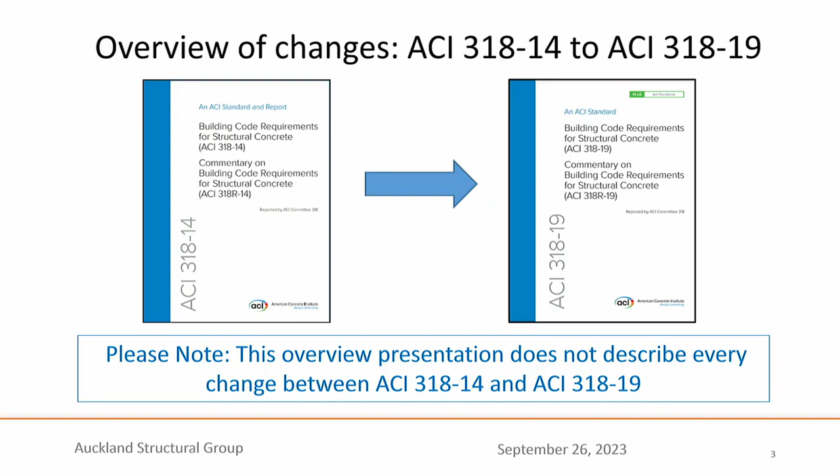Of course, there's a lot more background that I could fill in about the basis of the code as a whole, but hopefully this will get you interested and maybe provide you with some information on where we're headed in the U.S. with our concrete codes. Just a warning, if you are familiar with the 2014 edition, this presentation is not a complete introduction to all of the changes in the 2019 edition. I have to sort of put that disclaimer there.

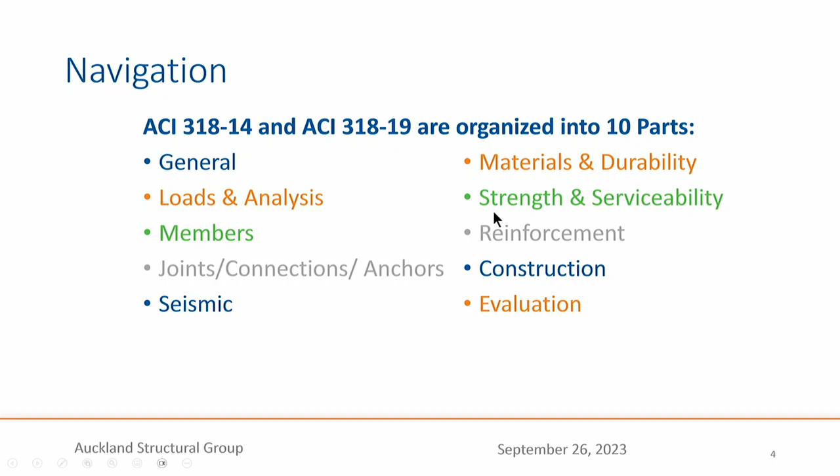So with regard to the code in general, it is organized currently since 2014 into 10 parts as shown here. I won't go through all of them, but you'll be particularly interested perhaps in the seismic part down here in the lower left. And I will be talking about some key changes and trends in most of these sections as we go through.

All right, first, existing structures. Very often we have to evaluate existing structures for their strength, their capacity, and sometimes for seismic capabilities or seismic resistance.

This code is for new design, but there is a provision that says if you want to use this code to design elements as part of a retrofit, it's perfectly valid and is permitted. The commentary to that statement points the reader to another document. It's actually another building code called ACI 562-19, which is the official code for evaluation and repair of existing buildings. I just want to caution that is not seismic evaluation and upgrading of existing buildings. It's all things non-seismic, although it does point to some other places for seismic.

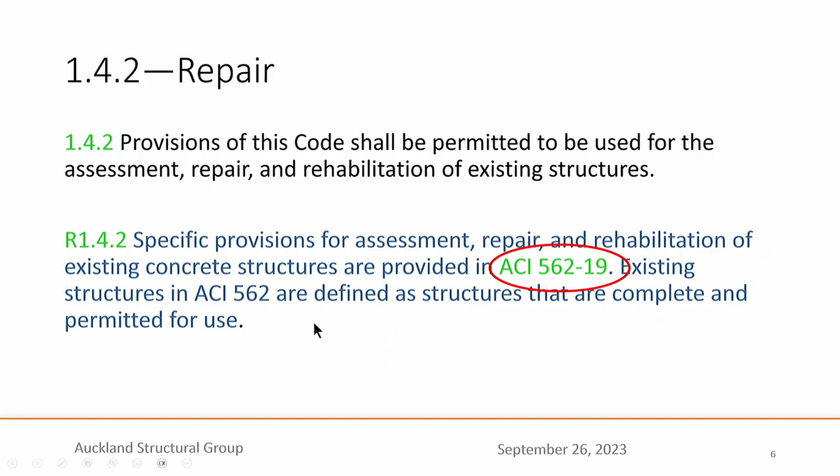So this is how we deal with existing buildings. But I want to also point out there's a chapter 27. It's, I believe, the very last chapter of the code. This chapter is titled Strength Evaluation of Existing Structures, and you might think, aha, that's what I need to know if I have an existing structure and there's a change of occupancy and I need to design, say, or check for higher loads in the building.

It's really what it applies to is new construction where there's some doubt about the strength. Perhaps concrete test strengths came in low, or there was an error in construction, or for some other reason the building is new but needs to be evaluated. So we as engineers understand very well how to approach an existing structure that may have deficiencies and analytically evaluate its strength, taking into account those deficiencies.

There's another approach, which is load testing. This isn't used very often in the U.S., but when it is used, it's a very helpful and definitive proof of the capacity of a building. There are two procedures available for testing the strength of a new building. Let's just imagine that we're testing a two-way concrete floor slab.

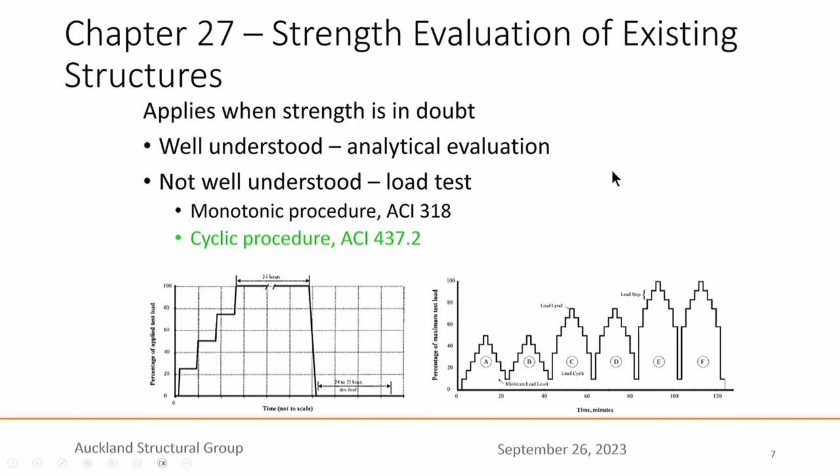There is another method, a cyclic procedure, which is in a different ACI document, ACI 437.2. The scale here is on the order of 2 hours. It's a cyclic load, unload, load, unload, higher amplitude load, unload, and so on. This, of course, then is a much faster and more efficient way to test the capacity of a new structure. So just letting you know about those two approaches.

Let's get into specific types of concrete members.

For one-way bending, one-way slabs, the ACI code has structural integrity reinforcement requirements. These are minimal reinforcement required to be continuous through an element, whether it's a beam or slab, and developed at each end. It's just a minimal notional amount of reinforcement to help forestall progressive or disproportionate collapse. It does not take the place of a progressive collapse analysis, just a minimum amount of reinforcement to help stop a sequential collapse.

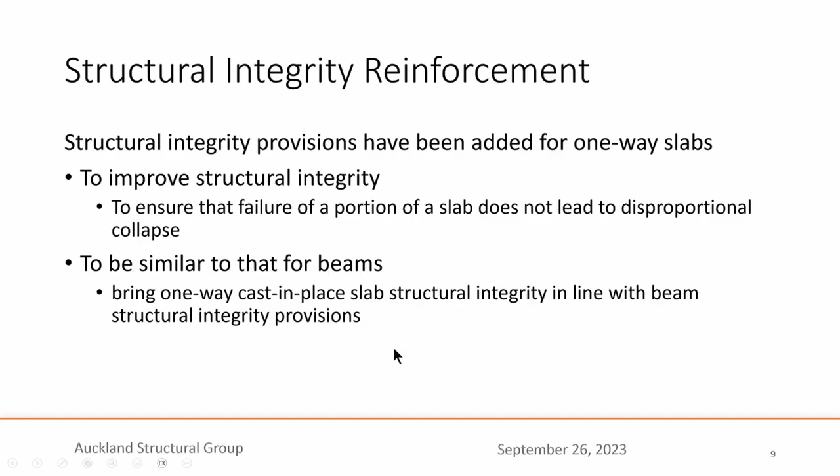There are new provisions now for this integrity reinforcement for one-way slabs, very similar to the requirements for beams. I won't go into the details, but it's a very simple check and a zero or low-cost detail, because the bars you need are probably already in the design.

Moving on to two-way slabs. We've had, since time began, two methods in the code meant to be approximate methods, introduced pre-computer-based analysis days. One is called the direct design method, and the other is the equivalent frame method. These are for two-way slab systems, two-dimensional approximate prescriptive methods. We found that those are very rarely used any longer, but they're still valid, nothing wrong with them. They're just approximate and conservative. So we removed them from the code, but put a statement in the code that those methods are still valid to be used.

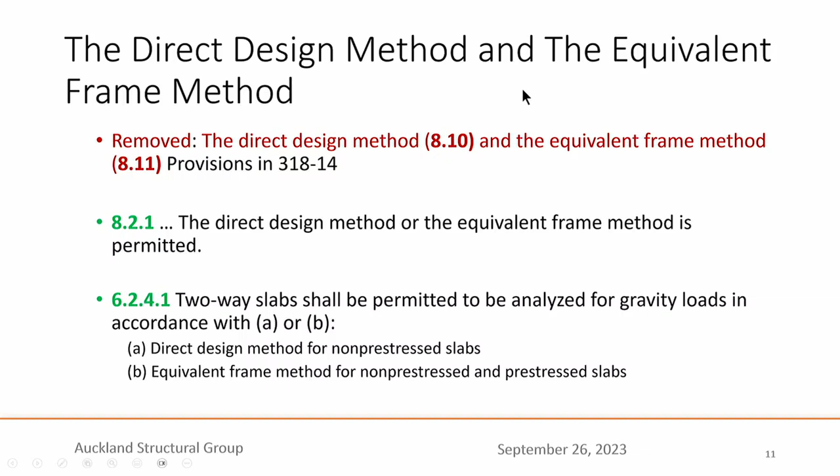Either the direct design method or the equivalent frame method, you just have to look back to an earlier version of the code, but you can still use them. We're just saving some trees by not printing as many provisions.

Here's an interesting one that has to do with openings near columns in two-way concrete slabs. Previously, up until 2019, the rule was that if there was an opening near columns or near slab edges, and that opening was within 10 times the overall thickness of the slab—H is the total slab thickness—then one needed to reduce the effective perimeter for punching shear. Those openings would have an effect on the punching shear strength.

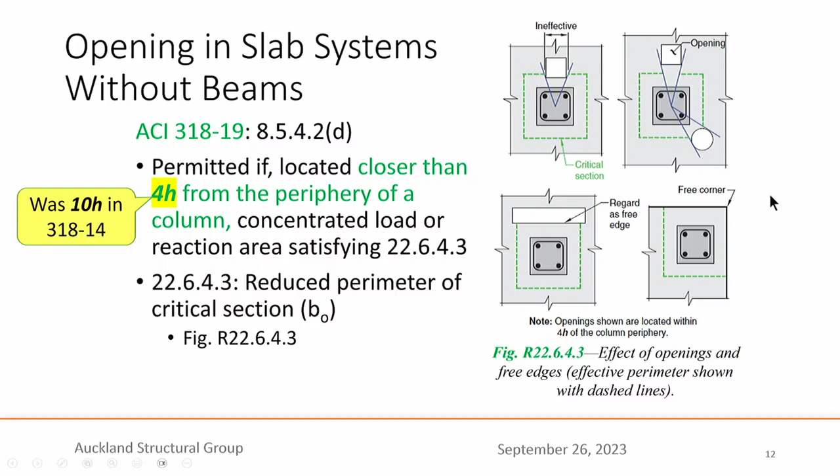That number has been reduced to... was 4H and is now 10H. Was 10H and is now 4H. So these openings can exist a fairly nominal distance from the face of the column and not affect it—or you don't necessarily have to check, you can if you like, but you aren't required to check for the effect of those openings. Kind of an interesting liberalization of the code.

Another new provision related to two-way slabs: in the United States it's actually quite a common form of construction to have 2 stories of concrete structure starting at the ground level, and then above that have 5 or 6 stories of light wood frame construction. That concrete portion is called the podium, and all of the wood shear walls in this 5-story wood building on top of the podium bear on this podium slab.

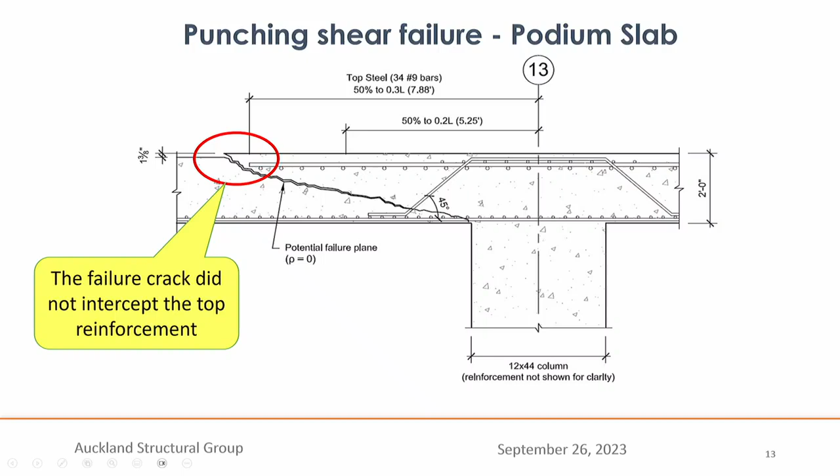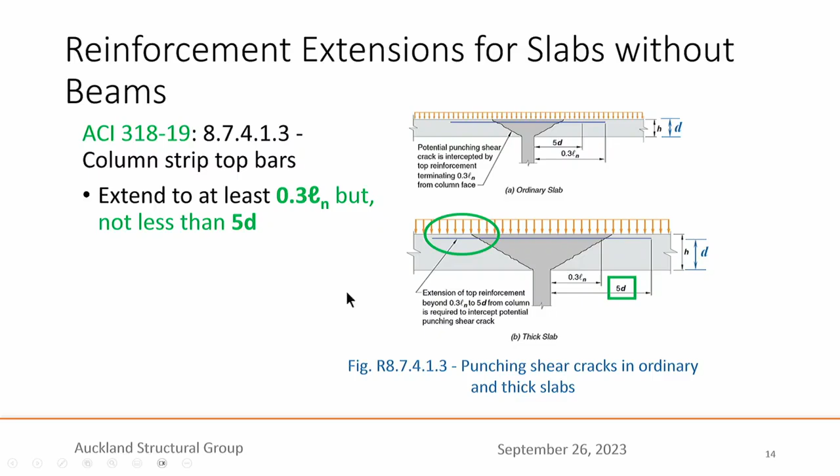On the top is the provision for a normal or thinnish slab, let's say 30 centimeters thick. Once the slabs get quite thick, there's a secondary check now to extend the bars further, so that they extend past the path of propagation of that punching shear failure surface through the top of the slab, and the bars are crossing that crack. We recognized a condition where something was not quite right, and we fixed it.

Post-tensioning construction: in some parts of the United States it's very common, for instance in the area where I live, the Pacific Northwest. In other areas, it's very uncommon. So the use of post-tensioning varies quite a lot across the United States.

One thing we updated just to simplify things: when you have a post-tensioned slab, you're also required to provide some non-post-tensioned deformed reinforcement. We simply changed the spacing requirements for the maximum spacing of that non-post-tension reinforcement so that it matches that for non-post-tension slabs—so it's the same for both types. That maximum spacing is either 3 times the total thickness of the slab or 18 inches, about 450 millimeters.

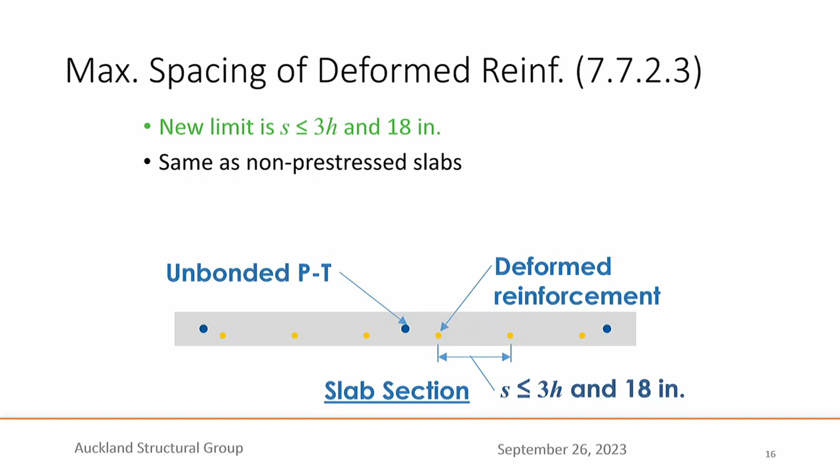Also related to PT: some forms of post-tensioned slab construction have groups of tendons very close to each other, called banded tendons. There may be as many as 8 or 10 tendons close together, with the anchorage forces concentrated in a line along the edge of the slab. To prevent bursting of the slab under these high localized pressures, we require backup bars and hairpin bars, which resist the high tensile bursting stresses that occur just behind the anchor. That's a new provision related to this configuration of reinforcement.

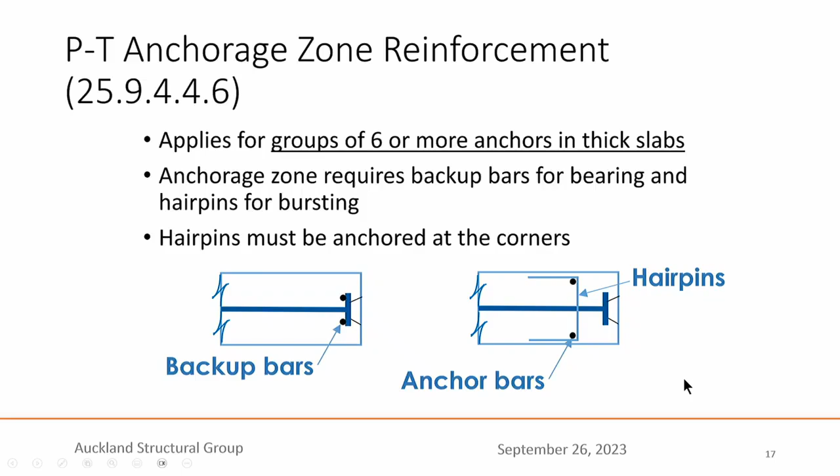Moving on to a new type of member, walls. We've had a change in philosophy related to cantilever retaining walls, in that we now treat them not as walls included in chapter 11, but as foundation elements in chapter 13. We reasoned that cantilever retaining walls are really closer to foundation elements than freestanding concrete walls, partly because the lateral loads on the stem are the dominant load controlling design.

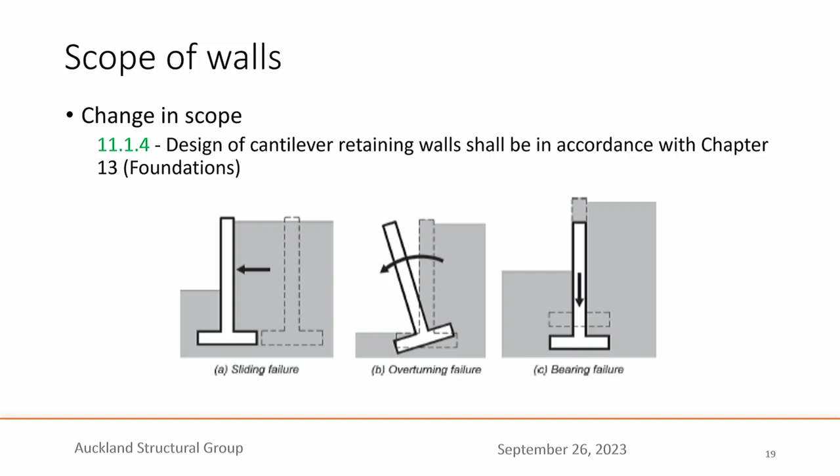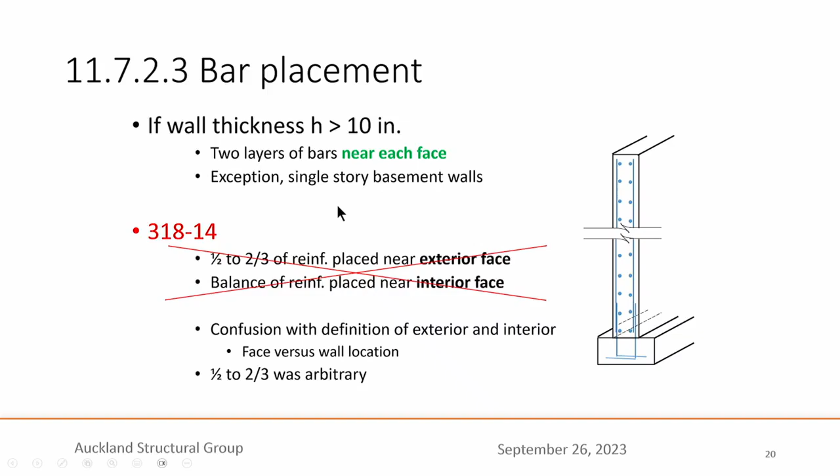Another detail that helps clarify reinforcement placement: prior to 2019 we had obscure, difficult to understand provisions about the number of layers of vertical and horizontal reinforcement in a wall. If the wall was greater than 10 inches, about 250 millimeters thick, you needed, and still need, 2 layers of reinforcement, one near each face. We had confusing rules about half going here, two-thirds over there, and we got rid of all that. Now you just need 2 layers of bars, and typically designers put half in one face and half in the other. We do have an exception for single-story basement walls, used a lot in commercial and residential construction, where this requirement is less important. So it's a simplification and clarification.

Foundations are a major use of reinforced concrete, and we constantly update those provisions in the 318 code. We added design provisions for cantilever retaining walls, now in chapter 13. We've also done a lot of work on provisions related to deep foundation design, covering driven piles, cast piles, auger cast piles, and various deep foundation elements used particularly in poor soil conditions. We've also added provisions related to minimum concrete strength for both shallow and deep foundations, and cover requirements to control corrosion.

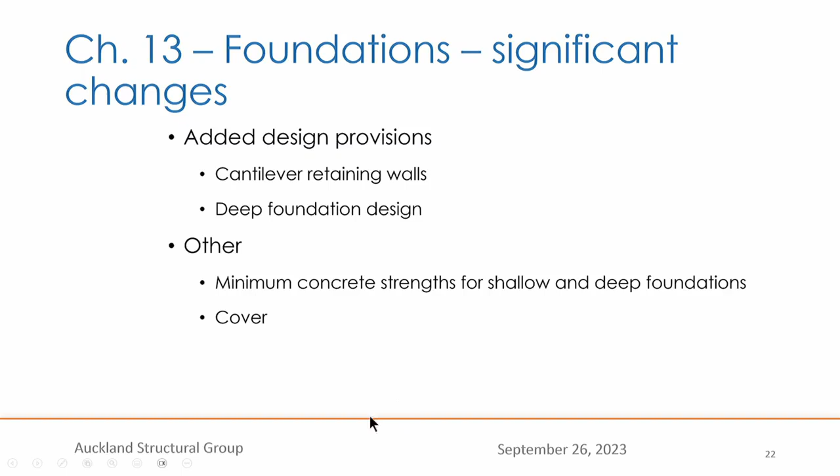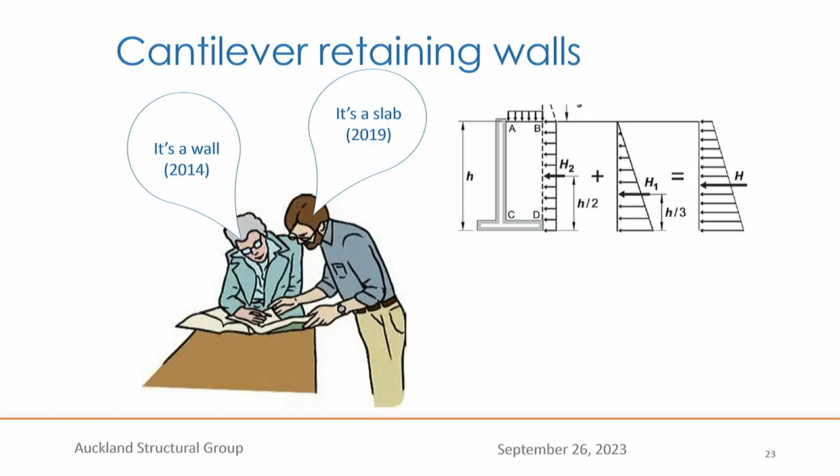I mentioned we moved cantilever retaining walls into the foundations chapter. We also changed the basic approach to their design. Previously they were treated as a wall, subject to wall design provisions. Most walls are not governed by very high face loads or lateral loads, those are what I'd call true walls. Retaining walls are heavily loaded out of plane, so we decided to treat them as slabs, cantilever slabs. These stems are now designed as a cantilever slab, a one-way cantilever slab, which makes a lot of sense.

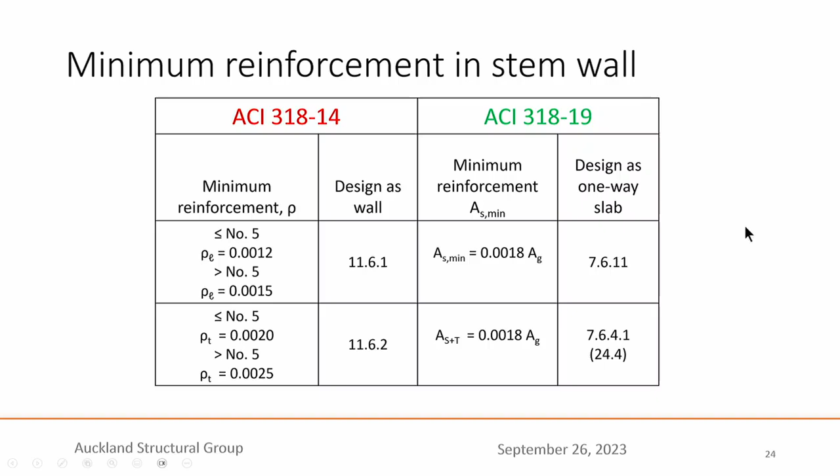Here's a big important change. In the U.S., for reasons I don't understand, we've had deep foundation provisions for concrete type deep foundations spread across 3 different design codes: ACI 318, the International Building Code, the master code for the U.S. that refers to material codes like ACI, the wood code, masonry code, and so on. But there were provisions for deep concrete foundations in the International Building Code, which shouldn't be there, they should all be in the ACI code. So we are gradually bringing all those provisions into ACI 318.

In 2019 we were successful at bringing many of those provisions out of the other codes into ACI 318, and we hope to complete that process in 318-25. We'll see.

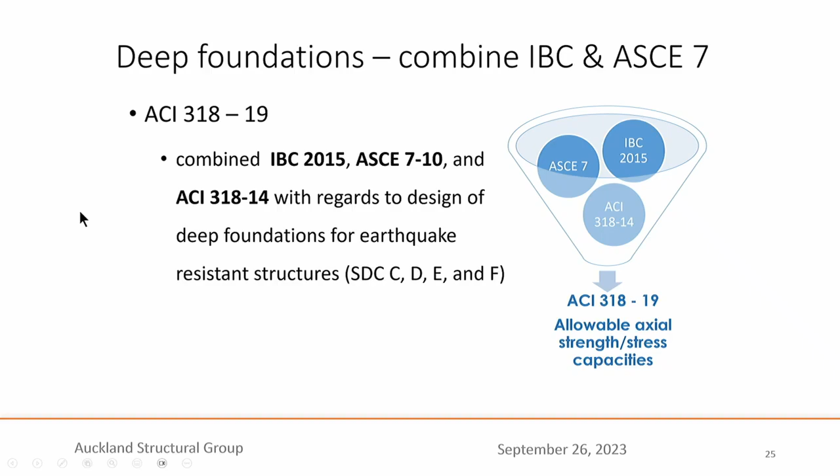Anchorage to concrete, everyone's favorite subject. We actually reorganized this chapter so that it mimicked more closely the organization of the other member type chapters. And we also added...

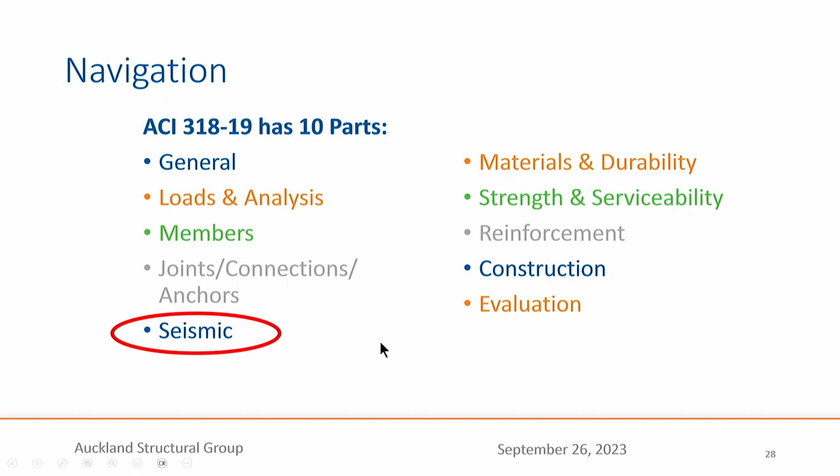So now let's talk about seismic. Really important subject, both in the U.S. and New Zealand. I want to point out there were quite a few changes to the seismic provisions between 2014 and the current 2019 edition. I wrote two articles in the magazine Concrete International with S.K. Ghosh summarizing every change in great detail, except for the deep foundation ones, because that would be like a whole other two articles. If you look online at Concrete International, I believe you can just find those for free. If you want to know what the current seismic provisions are in the 2019 ACI code, that would be a good place to get a very condensed tour through those.

So, another big change in seismic was we added what we call higher strength reinforcement grades to the code for seismic force resisting systems. This table here, which is very small, but I've just highlighted with green boxes the updates that are included to allow higher strength reinforcement. And what do I mean by higher strength reinforcement? We've introduced the possibility of using 550 and 690 megapascal strengths for certain elements of certain seismic systems.

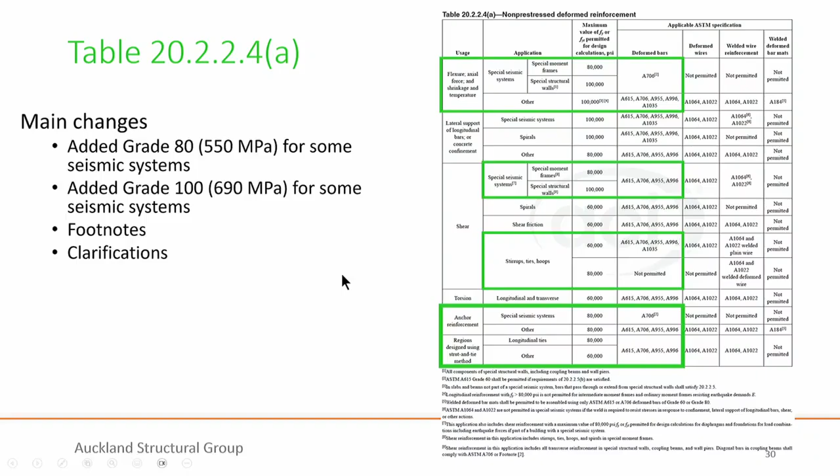All right, now let's talk about special seismic systems. We have what we call special moment frames and special shear walls. Special means they are detailed for the best possible seismic performance. There are also intermediate systems and ordinary systems of various or defined standards for different types of lateral force resisting systems which are deemed ordinary, intermediate, and special. I'll just describe the special ones here.

This is where these higher grades of reinforcement are anticipated to be used. The only changes really relate to the spacing of shear reinforcement or confining reinforcement for the higher grades, because presumably you are either using the same size or a smaller size bar. You're allowing a higher stress because they're a higher grade longitudinally. Therefore, their tendency to buckle laterally is higher than for the lower grades. So the lateral support of those bars needs to be closer together. Therefore, the hoop or tie spacing for the higher grades is reduced compared to the lower grades. So we just see that here.

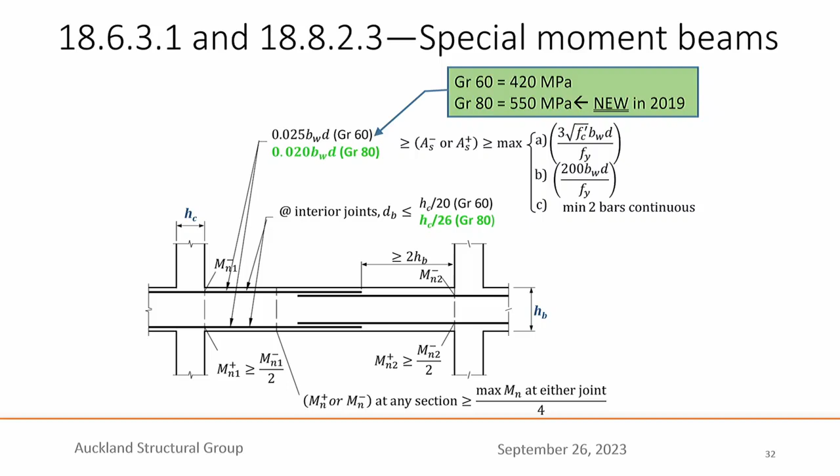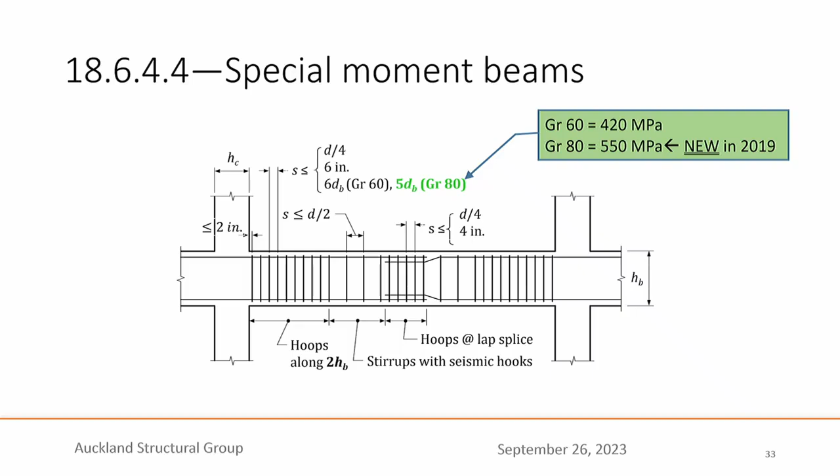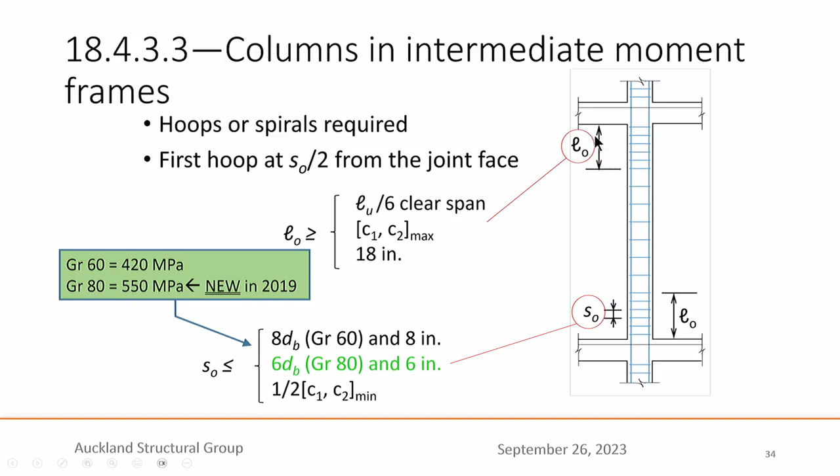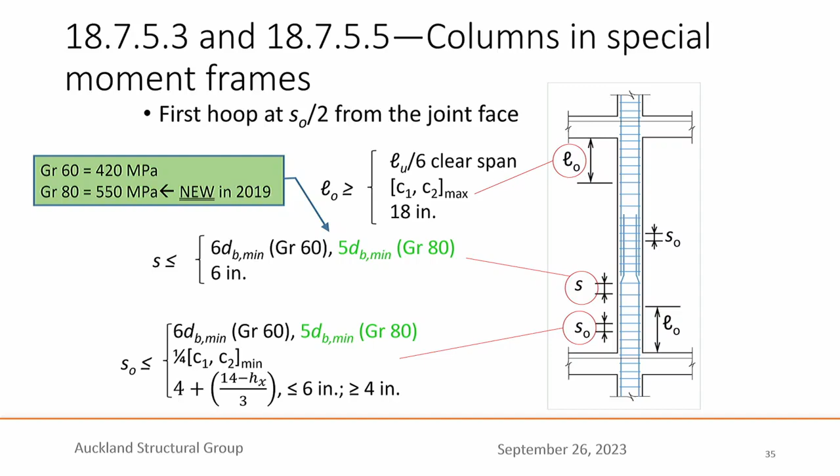Whatever's in green here is a new, slightly closer spacing for one of the higher grades for 550 megapascal in special moment frame beams. I won't go through these in detail, but also the spacing in stirrups in special moment beams has a slightly different requirement for 550 megapascal bars. Columns in intermediate moment frames have a change in spacing over these plastic hinge regions for the higher grade reinforcement. Columns in special moment frames have more reduction in spacing for the higher grades of reinforcement.

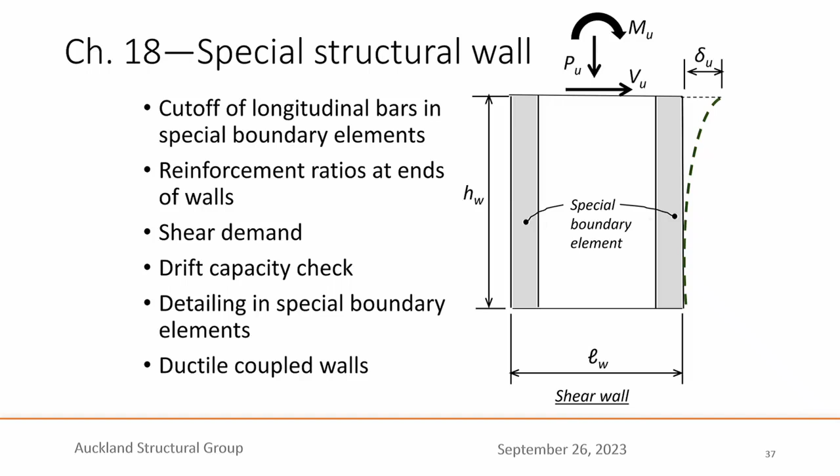And then we have a new old structural system, ductile coupled walls. I'll explain a little bit more about that when we get to it.

So these longitudinal bars running up the main flexural reinforcement at the ends of walls - we used to require that they be continued past the point at which they were no longer needed by 80% of the length of the wall. So if you had a very long wall, you could be required to extend those vertical longitudinal bars a quite long distance, 2 or even 3 stories, which doesn't really make any sense. It turns out that 0.8 provision came from a kind of crude beam analogy for walls that is not actually correct.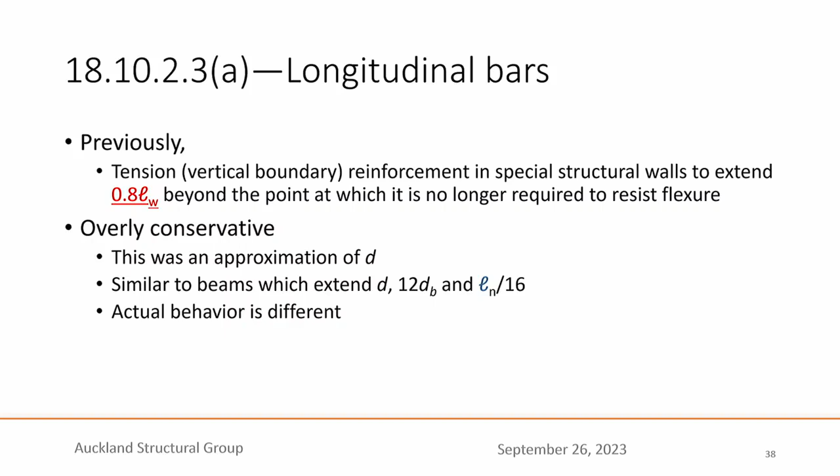So we've changed that to at least 12 feet - not quite 4 meters - but not more than 1 bar development length above the next floor. So gone are the days when these bars have to be sticking up in the air 2 or 3 stories. At most, they need to be sticking up beyond the next story 1 bar tension development length. So that has improved constructability quite a lot.

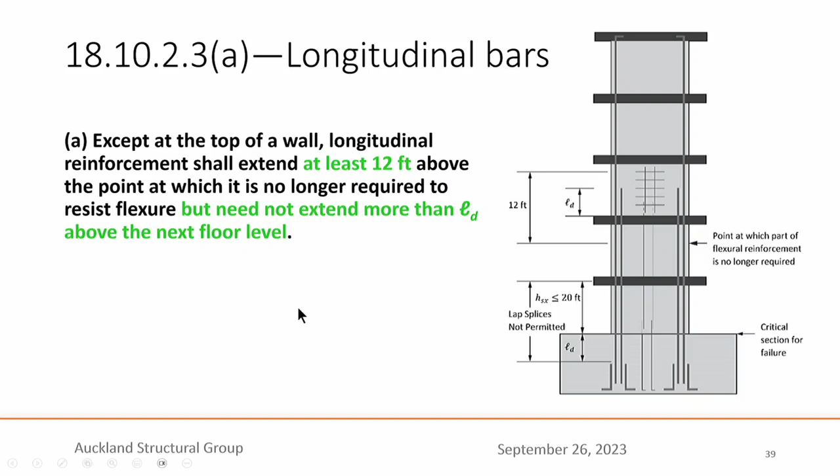However, the alternative here would be either to not do any splicing in that region or use mechanically coupled bars. Contractors don't like that because they're expensive. They do reduce congestion though, reinforcement congestion, so that's an advantage. But this is new - it's causing a little consternation amongst contractors especially, but we think it's an improvement.

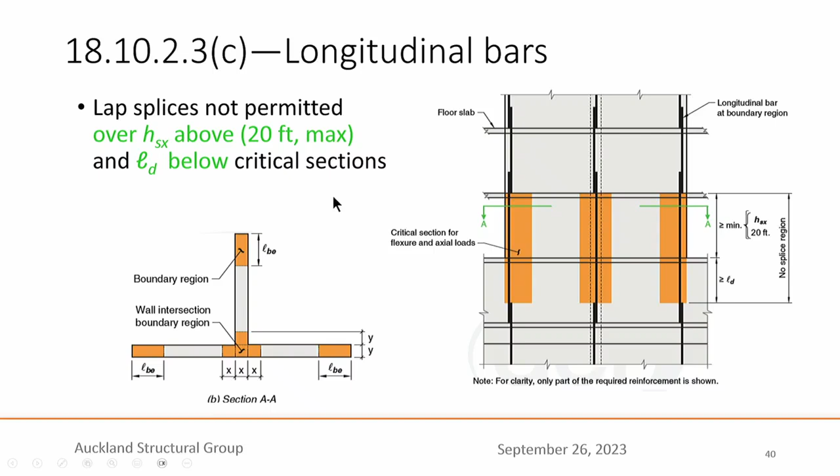Now comes a provision which was adopted in 2019 and was originated by Rick Henry and Ken Elwood, who have both contributed to the ACI 318 Seismic Committee, and we appreciate their contributions.

So based on failures observed in Chile and New Zealand, if a wall does not have enough area of reinforcement near its ends, what happens is when the wall cracks in tension, only a few cracks - one or maybe two - develop, which is not a good thing because that concentrates all of the strain, the plastic or yielded strain, in just one or two locations. You don't get the benefit of spreading out that inelastic action through a number of cracks. These are examples actually shown in the code.

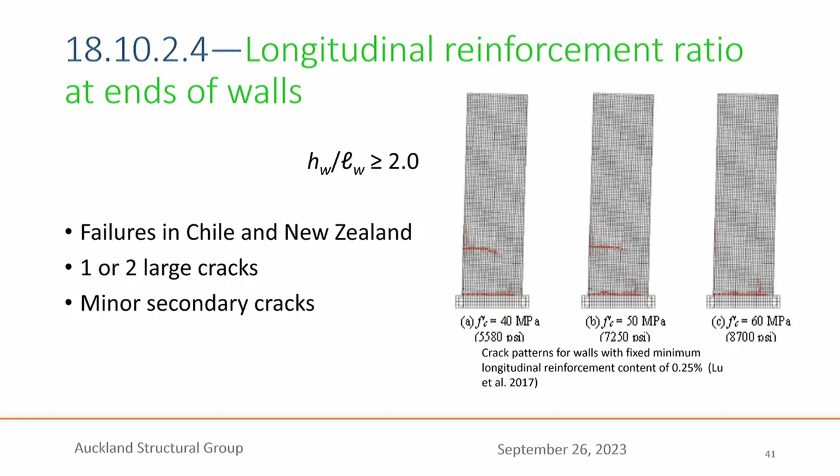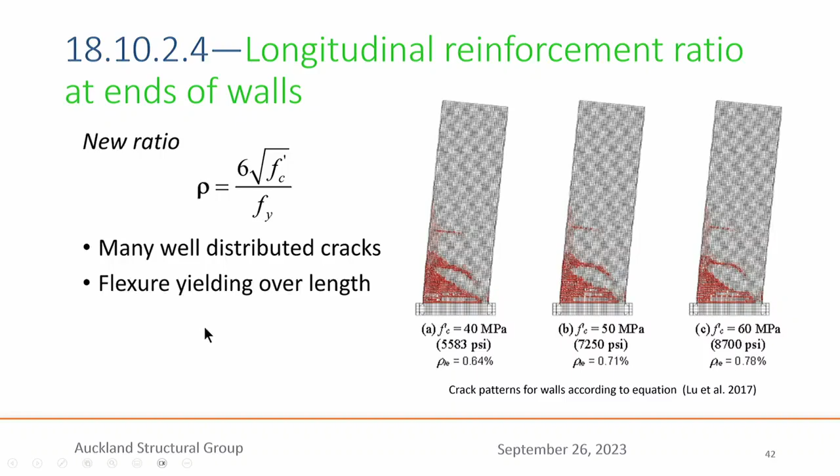And so that is a new requirement. We have found that it actually doesn't govern very often with the way walls are designed in high seismic regions in the US, but occasionally it does. So it's a good thing that it's in there.

Here's maybe the biggest change in the US code for 2019. It is the so-called amplification of shear - this is for the design shear forces for walls. It affects mainly walls that are tall and narrow. It's a phenomenon we have known about for a long time, both researchers in New Zealand and in the US, but it has never found its way into the code.

The phenomenon we're referring to here is an increase in the shear demand on reinforced concrete walls due to two factors. One is overstrength of the material - overstrength of the flexural reinforcement above what we assume in design. So maybe you have a 20% overage in yield strength, but you designed for the specified yield strength. That additional moment capacity leads to higher shear. So there's a factor greater than one related to the shear demand on a wall caused by overstrength of materials, both concrete and steel.

The second factor is higher mode effects. We typically visualize concrete shear walls, especially in tall buildings, as swaying elements. We may occasionally think about a second vibration mode, but what we don't usually think about is the contribution of higher modes—third, fourth, fifth, sixth, seventh. Those add up to a fairly significant increase in the shear demand on the shear walls.

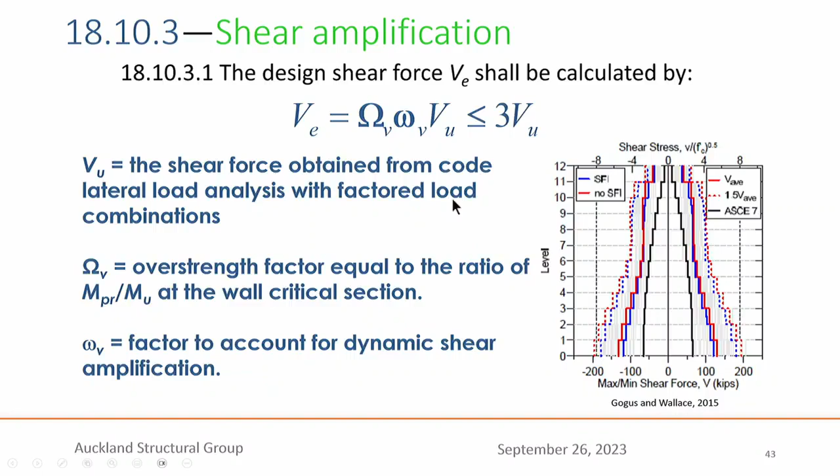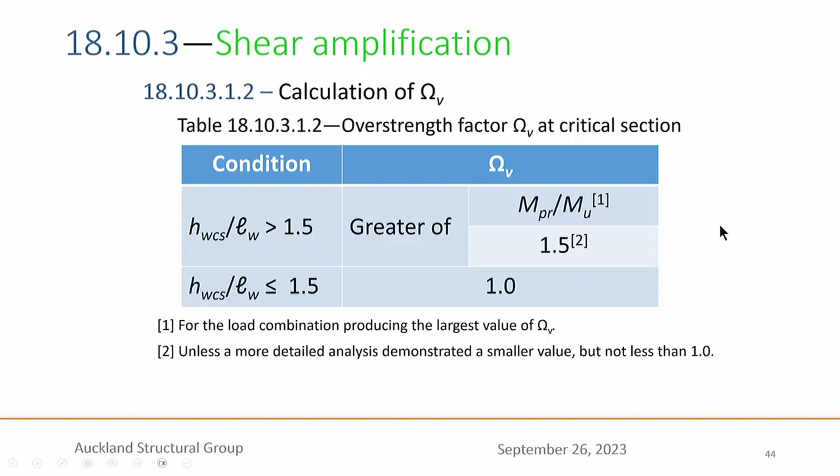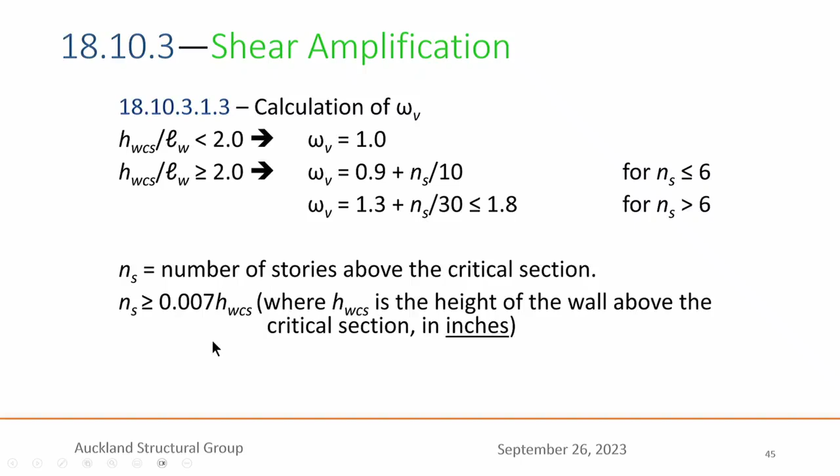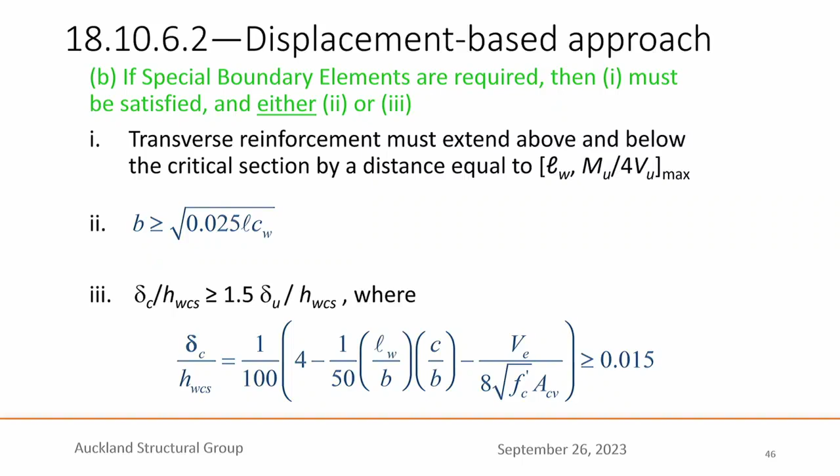I mentioned there's effectively a minimum wall thickness requirement that has been introduced. That is in section 1810.6.2. You can do it the simple way or the hard way. The hard way is option 3, which is difficult to use because it requires an iterative solution, which can be quite cumbersome. You can take the shortcut approach instead, which is direct: the thickness of the wall, B, has to be greater than 0.025 times the length of the wall times the distance from the compression face to the depth of the neutral axis in the wall. We find in US practice this very rarely governs, but occasionally it does. It's important to have a minimum thickness of wall to forestall lateral buckling of a wall that's too thin—if you have a very slender wall, when its edge is loaded in compression, it can buckle laterally.

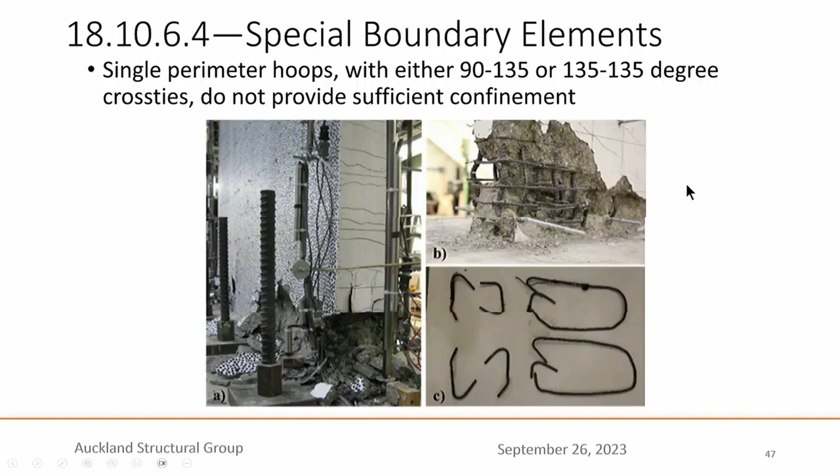Now we have new and improved detailing provisions for the confining zones at the ends of walls, called special boundary elements. These are starting to look a lot like what you use here. We now have requirements for overlapping closed hoops within these boundary regions at the ends of walls. We also have requirements for 135-degree hooks at each end of cross ties, and a requirement that every pair of bars within the boundary zone have a cross tie, including through the length this way.

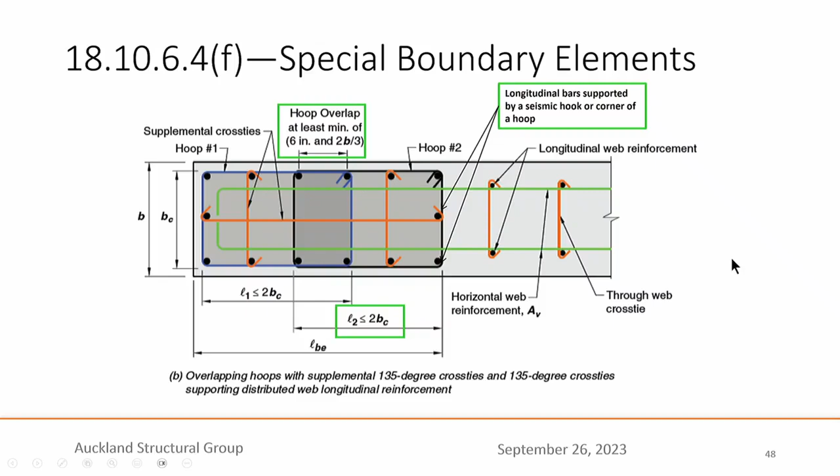In addition, we have a requirement that 135-degree bends are required on all cross ties outside the special boundary zone, which is given by this length L sub BE. So this is a big change. We previously could use cross ties with a 90-degree hook on one end and 135 on the other. Contractors like these because you can stick them through, hook them, and jam them home—they're easy to install. This is much more challenging, so we're dealing with a lot of grumbling about that.

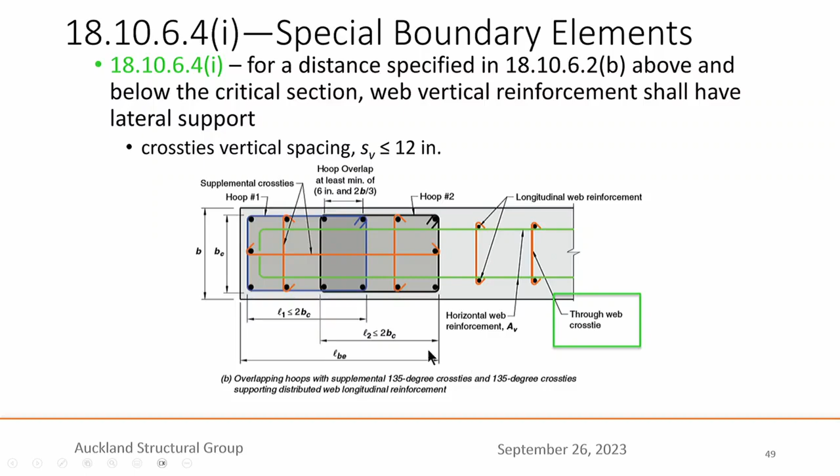Okay, and I already pointed out this slide relates to these cross ties in what we call the field of the wall, outside the special boundary element region.

We have introduced a new type of wall, which is actually an old type of wall, and we've given it a name: ductile coupled walls. There are, I believe, millions of these walls constructed around the world—you can see they're very familiar. It's a solid wall and another solid wall with connecting beams. Those beams couple the two walls and make them act together. In the extreme, they would act as one single wide wall; if those coupling beams are very weak or flexible, the behavior would approach that of two independent walls.

However, this type of wall has never been explicitly defined in ACI 318, and that's important because until that definition exists, the other dominant code in the U.S. for loads and structural system definitions, ASCE 7, will not specify seismic parameters related to designing this kind of wall. Somehow we have gotten away or gotten around having those parameters for decades.

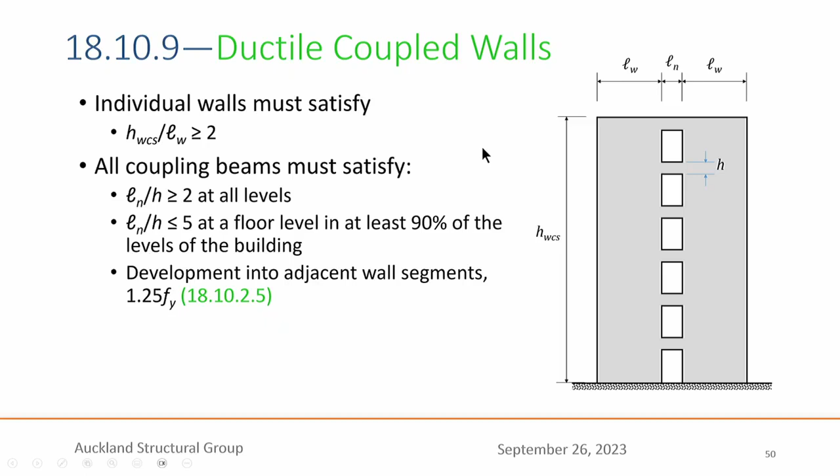Finally, we define this ductile coupled wall. The definition is given here—I won't go into it, but it has to do with some geometric constraints on these elements. If you meet those requirements, you have a ductile coupled wall, and then you have seismic design coefficients or parameters in ASCE 7 specifically for ductile coupled walls, which are actually more generous than the values we had before we defined ductile coupled walls.

So that's the reasoning for doing this. Okay, so I have talked about some general trends with the

2019 code. I want to just very briefly go through some things that we're working on for 2025, just for your interest. We are writing a new appendix for the code.

The code historically has had various appendices on different topics. Once an appendix goes in, very often it moves in to become its own chapter in the code in the next edition. In any case, we have written an Appendix N, which is for sustainability provisions.

This is not a chapter which specifies limits on global warming potential or other metrics for defining the sustainability of a concrete mixture or a concrete product.

It simply says if you are going to define the global warming potential or the life cycle carbon load of a building, this is how you ought to do it. But we don't say what the limits are that you might have to meet.

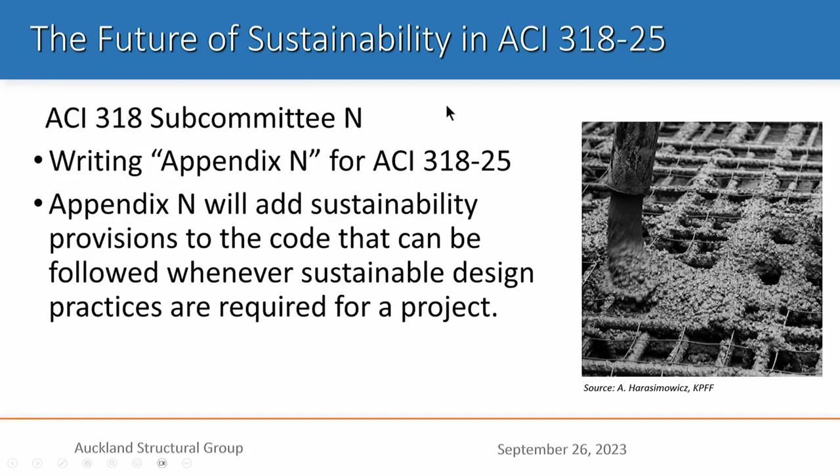We believe those are better determined by local governments, local jurisdictions, because they're highly location dependent, what's achievable and what's not achievable in terms of global warming potential for individual mixtures.

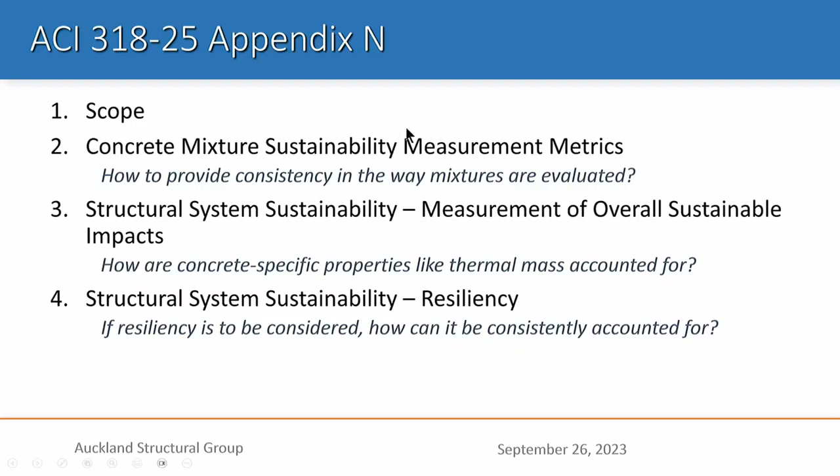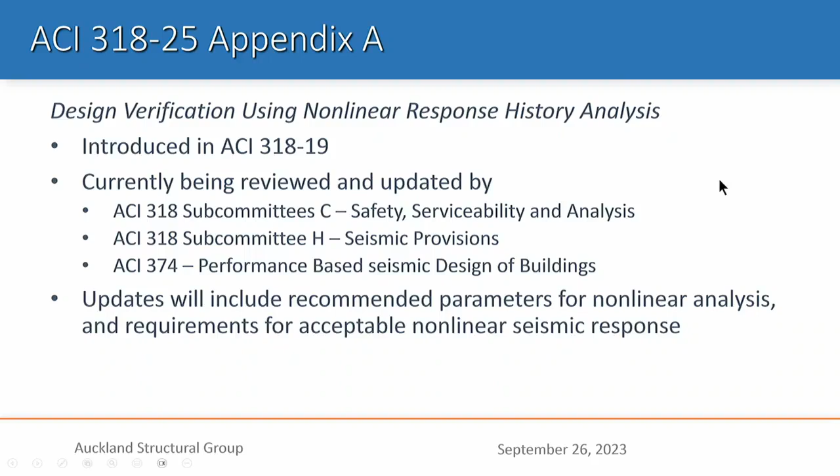We had to write this because another code started to write provisions for doing nonlinear response history analysis of concrete structures, and we wrote them a letter and said, no, you shouldn't do that, and we'll take care of it. So we did it. That is evolving. It will probably get more complete with each edition of the code.

Anchoring to concrete, we aren't changing too much, but we are exploring this question of if you have a reinforcing bar of a certain length and an equivalent anchor of a certain length, an adhesive anchor or a wedge anchor or whatever, why is there a difference in the way we treat the development of those two things?

And the other thing is, if you have a group of embedded bars and you have a group of closely spaced concrete anchors, why is there a difference in the capacity of that group, at least under the ACI 318 rules? And maybe there should be.

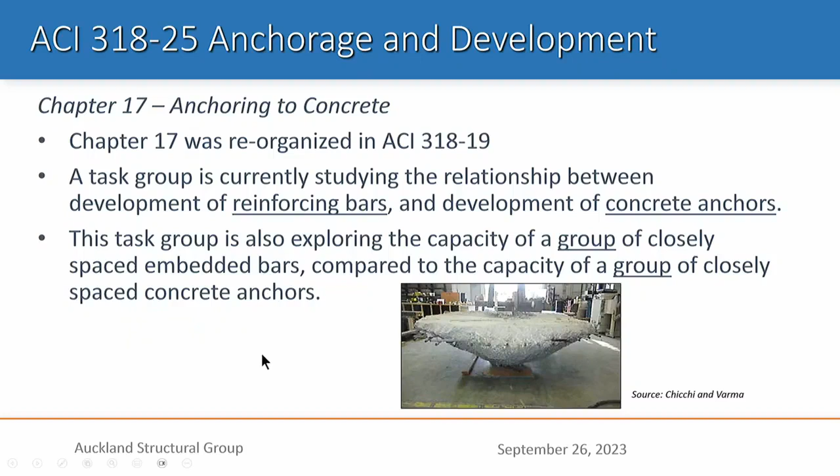This subcommittee, Subcommittee R, is exploring that, and we'll have a few but important updates to the code regarding groups of bars and their development in tension.

We have a new appendix under development related to performance-based wind design. You're probably familiar with performance-based seismic design. In the US, there's emerging now a trend to do wind design, especially for tall buildings, using a performance-based approach.

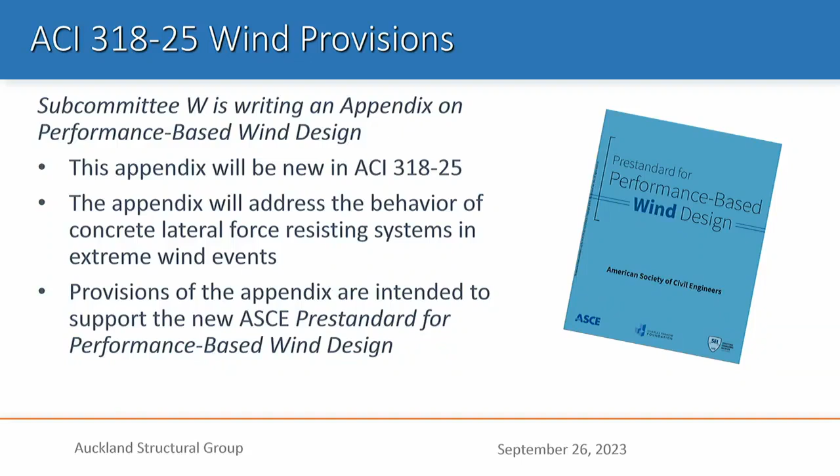And so again, in response to other codes developing provisions on that kind of design, we're developing an appendix for performance-based wind design in ACI 318. We have found that the new provisions introduced in 318-19 for one-way shear strength have some issues.

Frankly, they don't work very well for tall cantilever retaining walls and for some types of very thick footings, as illustrated here. We're updating those to try to take care of that problem. It is definitely a problem, though, that we are fixing.

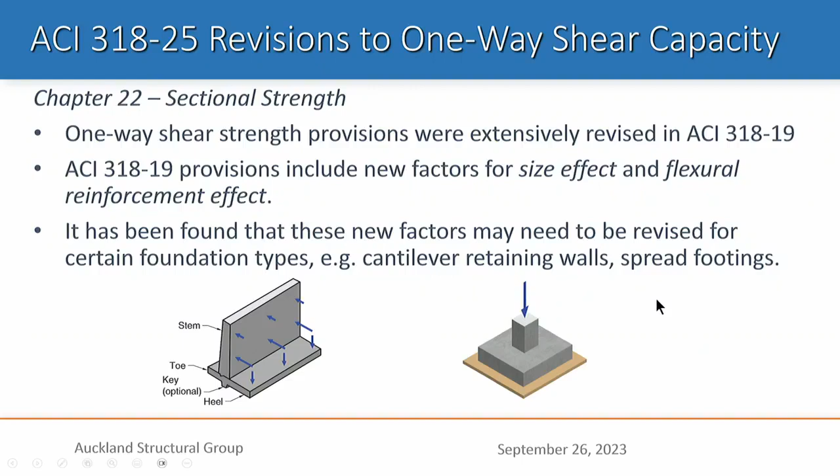Briefly related to precast and post-tension concrete, we used to treat those in one subcommittee. Now we're treating them in two subcommittees in ACI.

In addition, ACI has authorized and initiated the development of two new separate concrete codes, one on precast structural concrete, 319, and the other on post-tension structural concrete, ACI 320. Those are under development. I really don't know if they're going to finish them by 2025, but they are completely separate from ACI 318.

Even though 318 contains provisions for precast and post-tension concrete design, these codes will go further into more details and so on. So the basics will still be in 318, but there will be these specialty codes that will provide more detailed guidance for more complicated situations.

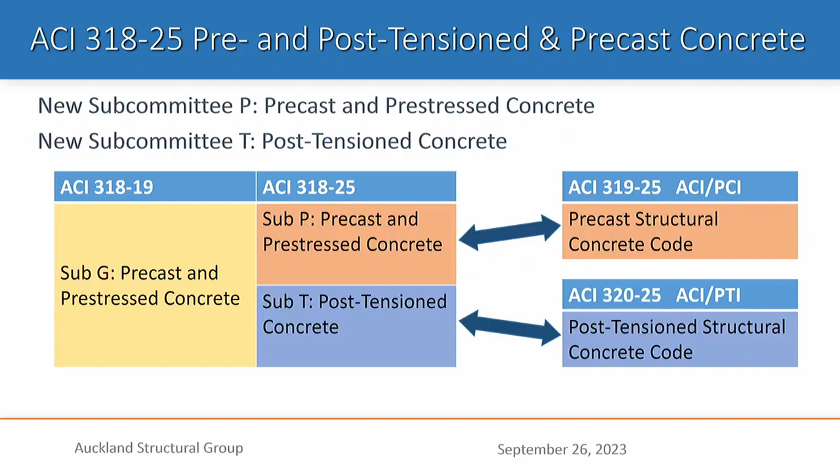So that's it. I talked about some changes and trends in the evolution between 2014 and 2019, the editions of ACI 318. And I just gave you a highlight of provisions that are being considered for 318-2025. I just wanted to point out, this is not an advertisement, it's just some advice.